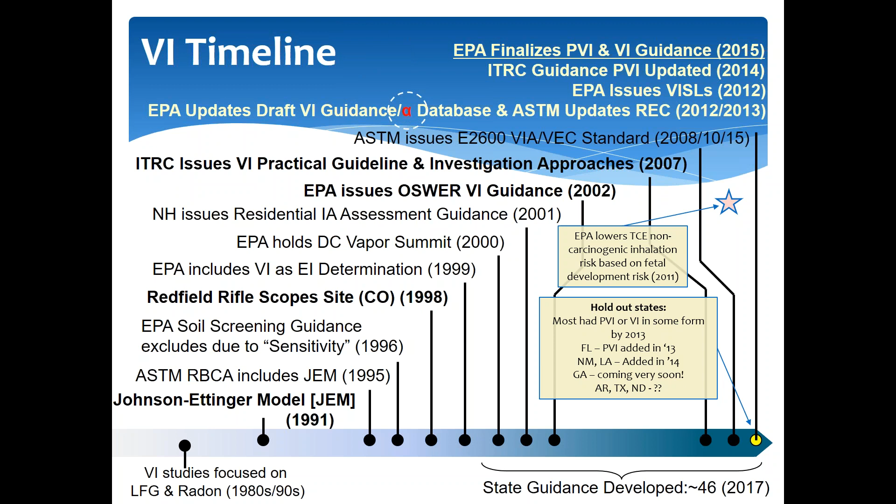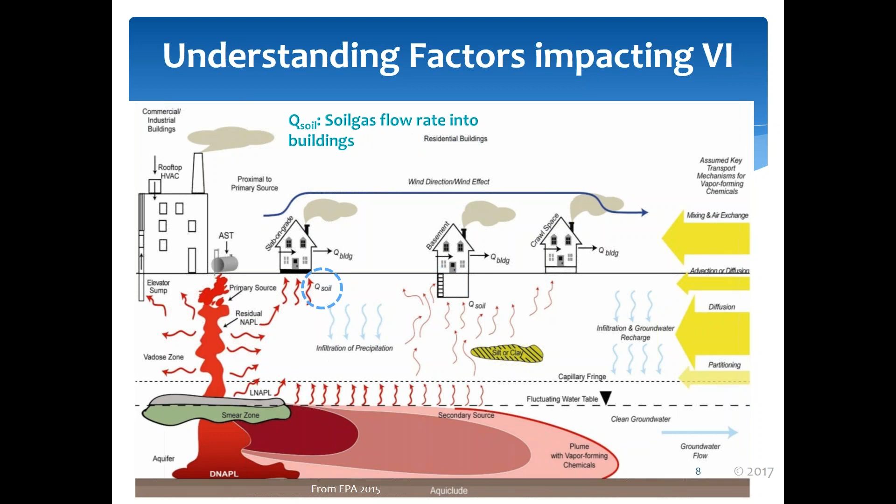All right, so behind all that work—sorry for the fancy curtains—we have what I'll generally refer to as your conceptual site model, an understanding of what's happening that can lead to why I believe there is or is not lines of evidence suggestive of vapor intrusion. The two most significant ones we often focus on are understanding right at the structure what the soil gas flow rate into the buildings actually is, and within the structure itself, how much air exchange or movement of air we're going to see.

Those become the most receptor-based criteria we can look at. The other things are happening in the environment. So a release has occurred, as you look at the left side. That release then takes on several phases—it might be in the soil gas phase, it might be free product, it might be a dissolved phase in the groundwater—but each one of those has a volatile component, if we're tracking a volatile organic compound that we're concerned will be related to vapor intrusion.

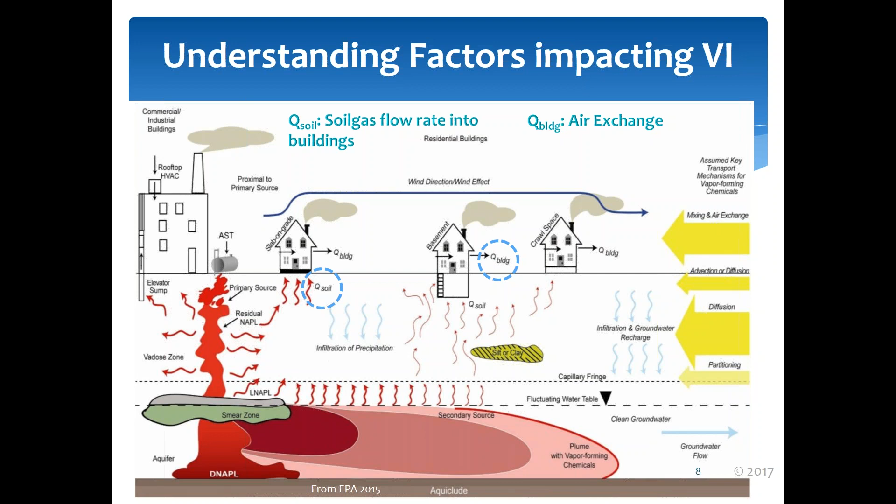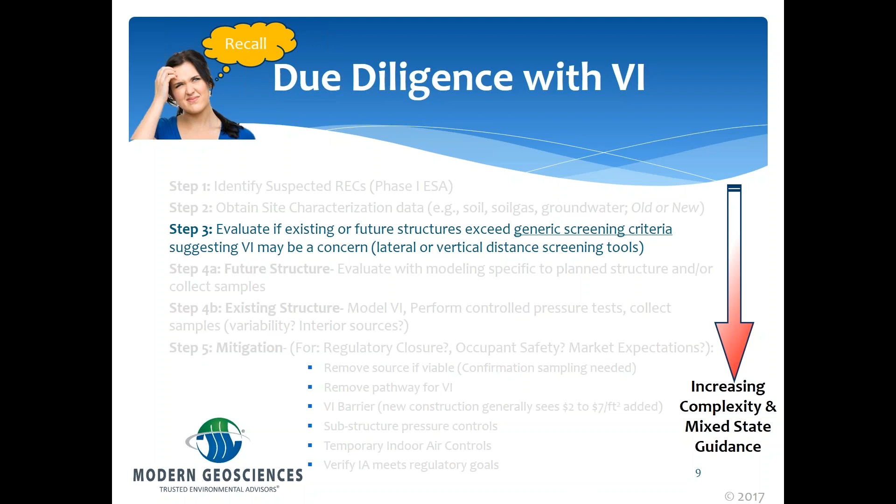So just to jump back to where we were, looking at environmental due diligence in general—what are the steps that normally lead us to beginning the story, understanding the story, and finding an end to our story? So whatever we got to first, we did our initial investigation. Maybe some site characterization data was collected, maybe it's ours, maybe it's somebody else's. But we reached a point where we determined we need to screen and say whether there is or is not a concern.

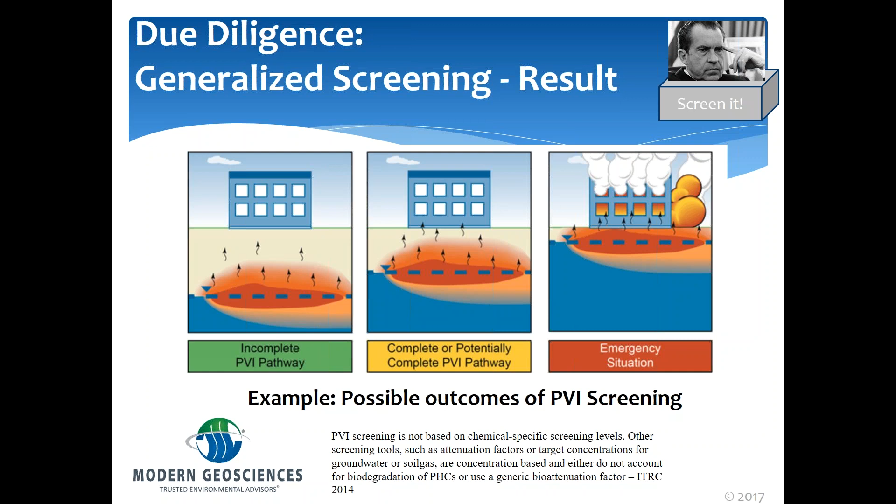It's hard to do jokes with this stuff here with no audience.

Whenever you do screening, you have this initial criteria—we may have, like I showed on that last slide, a situation where I'm in the middle, I've got some data, I think there could be a concern, I think there might not be a concern. When you're evaluating all of those, you have to understand what went into that screening criteria. Almost all of them—I'll say all for these purposes—exclude situations where there are preferential pathways in which you would not anticipate attenuation from where the release occurred through some media to where the receptor may be exposed.

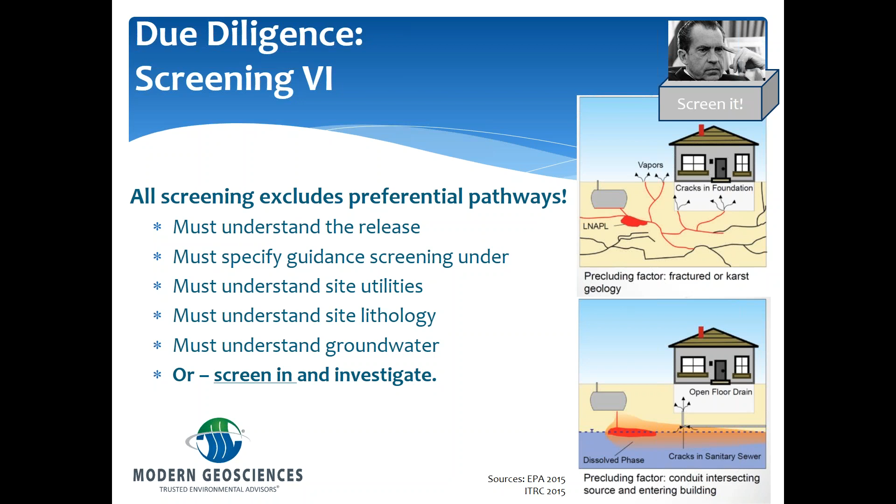As we begin to look at what we need to do next in this due diligence understanding, I'll make a segue into what we learned from a lot of these area-wide studies that have been done, several very high-profile studies. They've had a lot of scrutiny, a lot of data collected after the fact. There are some things we can know as we begin to look at what our scope needs to be going forward, so some of the lessons learned, if you will.

As I begin to scope, I'm just trying to inform how I would approach a vapor intrusion concern. I've now screened it and know I'm going to have to do something about it. So I want to know going in that the inhalation-based criteria we might use, the numbers you and I would breathe, can often be below background numbers for these specific compounds. It turns out we have lots of compounds around us that would fall under VOCs and even be a potential concern.

The second is just to give an honorable mention to TCE, because it's become a big risk driver since 2011 when some toxicological information was updated.

The other list of VOCs and related indoor sources, where these things could be up to 90% or more of just this compound, may be from your vehicles. So if we've got an attached garage, we want some information on all these paints and adhesives, cleaning supplies, gun cleaners, with some of them being just TCE, insecticides, air fresheners, dry clean clothing. All these things can play into your understanding.

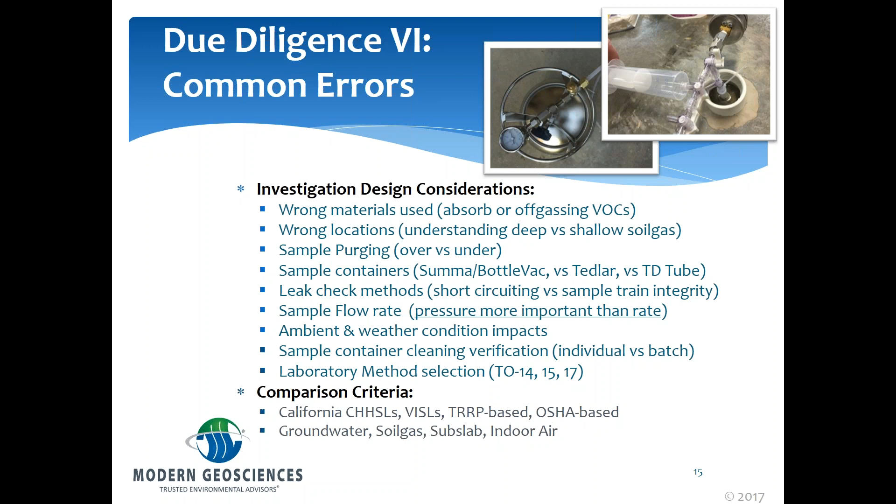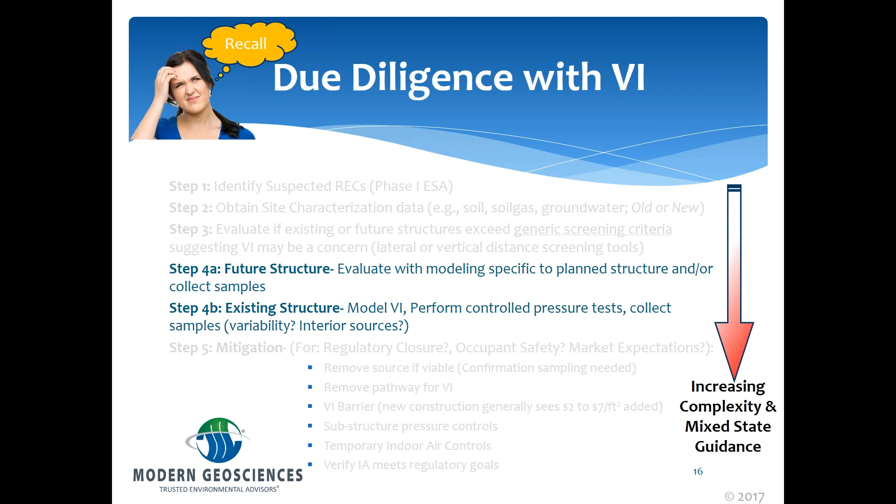All right, so now this brings us to where we were in this storyline. We were looking at our due diligence before, we've just talked about screening, we pulled it in, we've got an understanding of the framework. So now we really just need a structure - how are we going to investigate if there's a future structure planned or if there's an existing structure planned? So some variability with those two that we want to get answers to.

So we want to understand the regulatory structure we talked about. Will one event be enough to satisfy all the parties? Will we use some initial screening in the field to actually place our points? They're so important to us, and we have just a certain number we can use. I'll do some initial screening oftentimes and then plan where I put my soil borings, my wells, and even my soil gas points. And then do I have all the necessary supplies before I ever mobilize to the field?

Right, so we have to have that framework. So with that in mind, we want to understand what is our conceptual site model - our full understanding of the site. So here's an example of one where we may have a lot of data. I rarely get this level of data.

Hopefully my mouse can show up in here. You may have an understanding of what's going on at the surface - former structures, current structures, planned structures, soil data - and then some profile understanding of the lithology you're in. Is it going to be fine-grained, coarse-grained? Are there actually known exceedances and releases on the site?

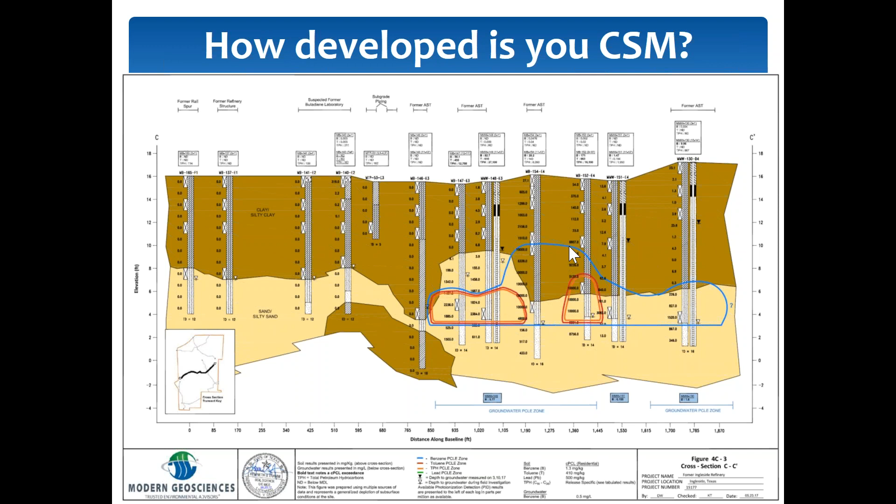Beyond that, where's the groundwater impacted versus not impacted? All these elements will feed into where I would choose to preferentially find a representative sample to help my client make a decision, or to help a regulator make a decision of whether I have the potential I need to go into the structure and answer all those questions, or if there's enough information, perhaps subsurface, to answer those questions. They each depend on the site, your conceptual site model, and knowing what you want to do next.

All right, so with each of these, you'll want to understand the different variability that's ahead of you, just like that conceptual site model had. So if you have spatial variability, I may actually have a source in one area versus another. I may have heterogeneity versus homogeneity, which allows me to take more samples versus less samples to get the representation I think I need. I want to have an understanding perhaps of the oxygen distribution if I'm dealing with a petroleum VOC.

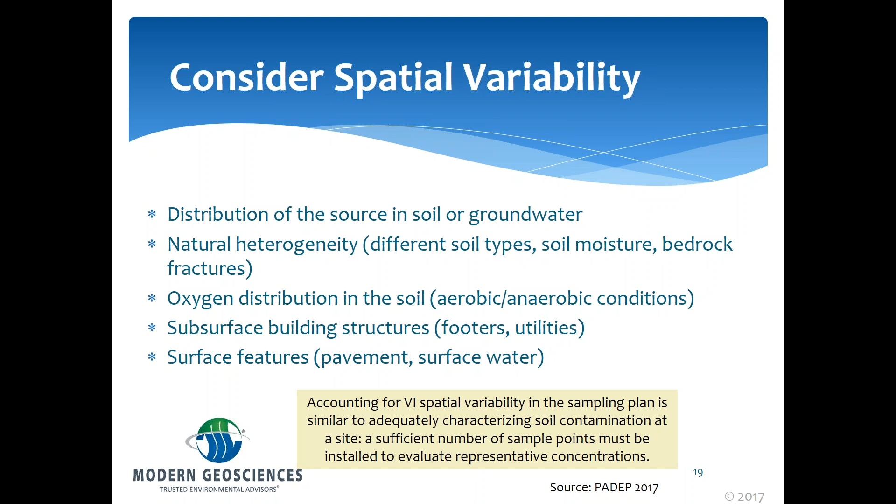Subsurface buildings and utilities, we talked about preferential pathways before. And then even at the surface, are there pavement or surface water features that may become an impediment that can inform why I think things would be in one place versus another. Again, it's all about getting a representative sample that you believe is a conservative understanding of the site.

So that's your spatial component. There's always a temporal component too, right? Things change, that's the nature. Groundwater and soil don't change as much on us, so we've gotten comfortable. But understanding am I actually here at a time period where I'm going to collect a conservative representation of the site will be important, knowing things such as the wind, the direction and speed, barometric pressure, the temperature.

Inside versus outside, obviously if we're warmer inside, specifically by maybe 10 or more degrees, I feel that's more conservative than the reverse. Precipitation and its ability to actually clog a lot of those pores is an understanding for the site that you're going to want to have.

The building itself and how it's laid out and constructed and actually in use will be important. Ambient contaminants that are from indoor and outdoor sources will be very important. And then understanding the potential for sample errors, as we talked about just a minute ago.

So here's a basic presentation. This comes from Pennsylvania, where you might choose to take different samples. So in this example here, we've got our concern. In this case, it's a tank. We love to blame the tank, so it's a good storyline to start with.

We, in this case, believe there's a preferential pathway. Maybe there's a sewer line that's connecting not only underneath where the tank is, but it goes all the way and connects to the home. So in this case, I may have information from what you see as number 1, which is a soil sample, number 2, which is a groundwater sample. There may be a reason to have other groundwater samples closer to the receptor.

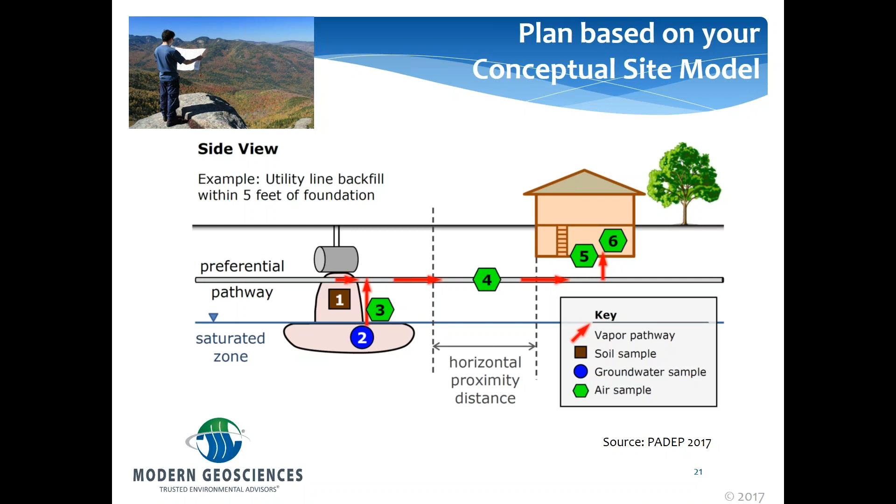So now the specifics of collecting each of those samples. In this scenario, what I have here is if a building is there or not there, we often turn to a soil gas monitor point. It might be called a vapor implant, it might be called a couple different things because the nomenclature is still in play in different regulatory settings. But as you see up here by our friend Richard Nixon, right?

So I've got my building outlined here because there may or may not be one, but you could take a sample. It could be near the buildings where it's planned to be, or it could be underneath where the building's planned to be. And so typically this will be some inert tubing that's been selected based on the VOCs you anticipate, and it'll be constructed to a specific depth.

Again, that can have a regulatory connotation. I'd say the 5-foot depth has become pretty common, depending on groundwater depth. We do a lot where we have some deeper understanding and some shallow understanding. We develop some attenuation factors for sites, but that's kind of the ballpark way to look at it. You do need to let it equilibrate for a given period of time.

That can be hours, depending on how it was installed, to even days, if you're using something with an auger format that turned up a lot of soil, and so we need to let all of that equilibrate.

Then we would confirm we don't have any leaks, either on the probe side, subgrade, or in the sample train side. Then we would collect our soil gas, and usually you construct your end point. On the top right, you have a 6-inch stainless steel, versus on the bottom, I've given you a couple different probe and implant styles that could be used. Again, those are designed based on what you're sampling in and what you're sampling for.

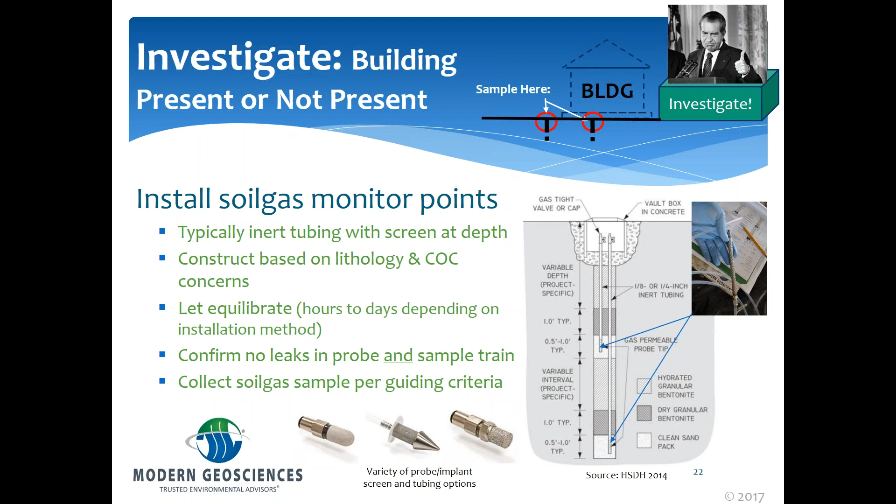Now if we do have a building, we have the ability to make some decisions. I can go into a structure if it exists. I can't go into it if it's not there. So I might use subslab, time-weighted, or come into an existing building and work with that building to see if we can actually make vapor intrusion occur.

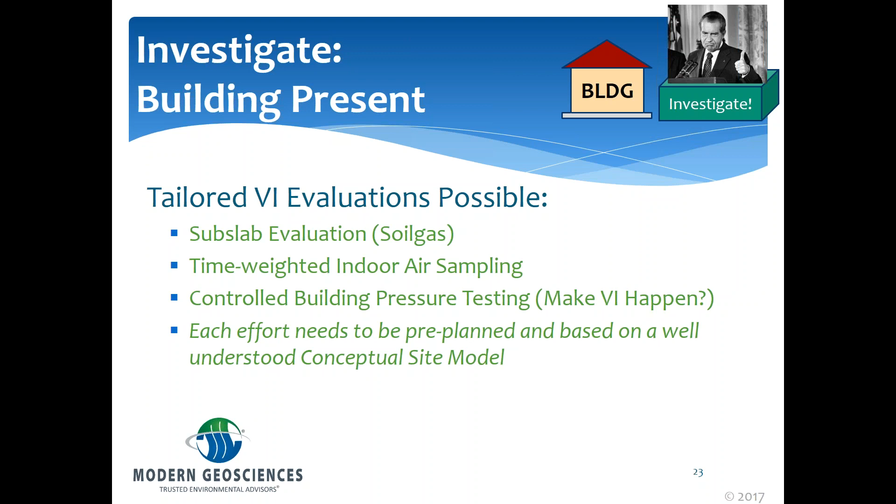So if we've made a decision that we've got a building and we want to do subslab, that's probably my second most common tool to collect information about vapor intrusion. Why? Because it's pretty inexpensive and minimally invasive. Usually we're going to go through the slab, make a very small opening, relatively cheap because the points are reusable.

And then we can do real-time screening either with something as basic as a PID to say hot, not hot, or we can bring a field GCMS out and say it's these specific compounds and within a ballpark these specific concentrations. We can also collect data that would give us information on whether attenuation is happening.

For example, is there methane physically there, or is there enough oxygen to attenuate petroleum compounds on the way up? So that would allow you to investigate, using these as an initial number of points, and from those make a decision—hey, we should go over here, or it's hot over there.

We've done that several times, very effective. It helps our clients get a lot done in one step versus maybe 2 or 3 iterations. And from what I'm told, time is money.

So the last part of that is you can then use these points to actually take your sample, similar to before. Make sure you've got integrity of the sample point itself and then the actual sampling train. You can actually get specific information here that I can't with my deeper soil gas, which is an understanding of the building pressure differential that may be happening sub-slab versus interior. So there's good information to be had for that. Easy to patch, and we're out. So a good tool to have in your mix.

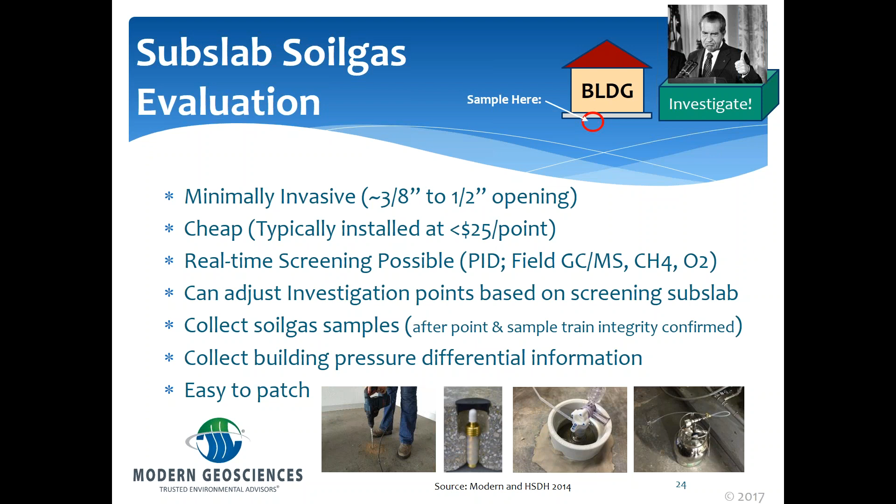You do need to understand that you can have really high concentrations and there be a lot of attenuation between here and indoor air. So keep that in mind.

If we jump to the other thing I can do when I've got a building present, I can take a sample of indoor air. Now I'll go to my last bullet point first here, because if I was going to do indoor air and subslab, I would make sure to do my indoor air first, just to avoid the potential that I would bias my indoor air by doing my purging of the subslab. So I'll just mention that because I have these in this order.

Within the air, once we step into a building, there are some more sensitivities that happen with understanding where you are. Is there a potential for indoor air contaminants to be adding to the story that have nothing to do with perhaps what you're investigating for? So obviously using those same tools we've mentioned before to answer that question is a big step.

Screen for those obvious vapor intrusion points. You see down below we've got near an electrical conduit—we do find electrical conduits which have connections not only through the walls but through the slab. Preferentially we do find a lot more coming from there than we do probably other areas.

Understand the weather conditions for where you are, any building parameters if you can get the information on how the HVAC system is working, what it covers, and normal operating conditions.

Like anything, if you're going to collect a sample for indoor air, you need to know if there's a potential to trigger any of these immediate response criteria, such as the short-term TCE goals that several EPA regions and states are using, because these numbers are low. I'll talk about background numbers in a second. But then make a decision on how long I'm going to run this, what kind of method I'm going to use, and make sure you've positioned yourself to get a conservative representation of site conditions.

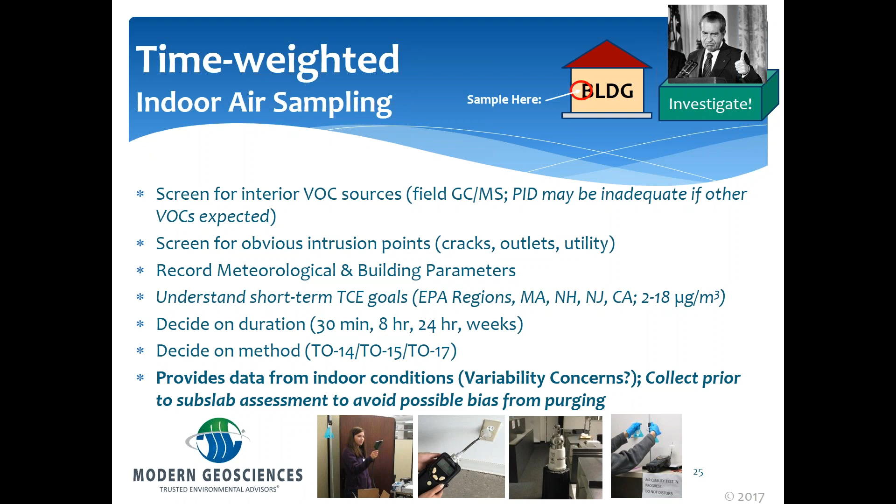The last element I'll mention is with smaller buildings or smaller areas, you can actually go and make a positive and a negative pressure. I was going to say normal, but normal is normal - you're not going to make a normal condition. But you could walk into a facility, investigate it as is, and then also control it and make it a high pressure building versus a low pressure building, specifically to cause vapor intrusion to happen.

So the one you see in the top right, that was one example. If you look at the bottom, under normal operating conditions for TCE, we found ourselves with 1.8 microgram per meter cubed. For PERC, PCE, 6.9. When we actually achieved negative pressure in the building, we had 66 versus 148. So we could make a conservative representation of what site conditions were, and definitely could there be a potential for vapor intrusion? The answer would be yes.

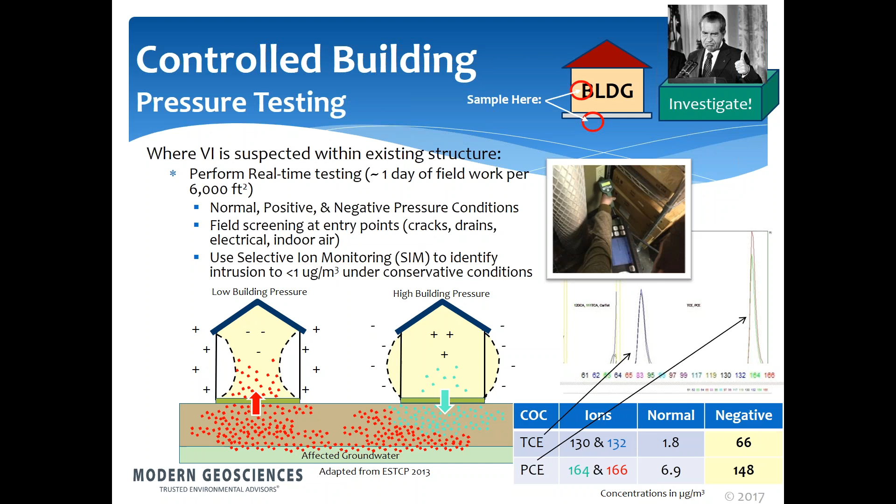All right, so background conditions. Now I've mentioned this a few times, but there's some concentrations of our friends - these benzenes, ethyl benzenes, PCE, vinyl chloride - where if we get into the 95th percentile of expected background concentrations in a residential setting, some of these numbers get higher than some of that criteria I've given you before.

Over on the right, you see a description of most commonly found compounds in background studies, from the top going to the least. So 96% of the time we're finding toluene, concentrations 0.03 to 1.9 microgram per meter cubed. And then move on down. Luckily, many of the ones at the top have higher numbers than what these concentrations are found.

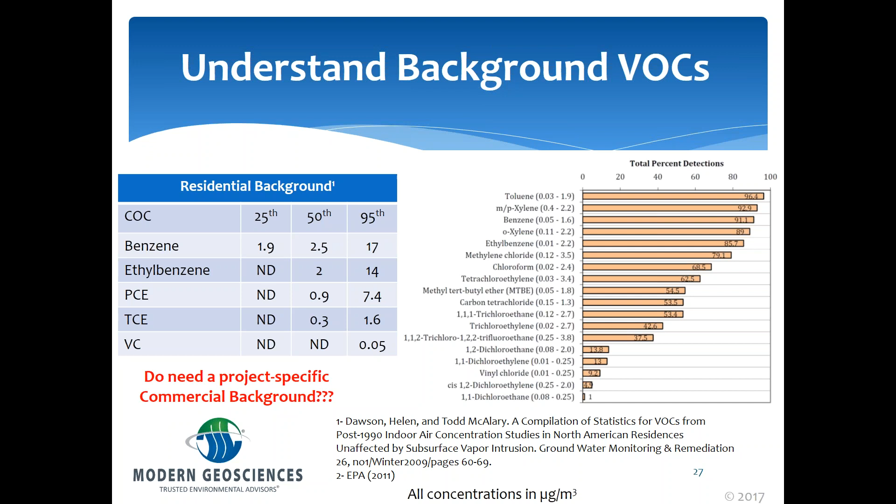But as you head to the middle, a few of these are starting to get close to numbers where they would be of concern. So we really need to know, are we talking about a background setting issue versus an actual release? As we look at indoor air quality, if we've taken a sample, we're now responsible to say, what does that sample mean?

So we find ourselves in the middle of this train wreck that exists between EPA and OSHA. No comedy intended with the accident in the top right, but OSHA ensures employers provide a safe work environment. They have the authority to promulgate binding national standards to safeguard worker health and safety - legally defensible, been put into courts and used for decades - and they actually publish permissible exposure levels. Now those do incorporate economic feasibility, so if we're going to judge risk, I can't have that criteria in my understanding if I was just going to be black and white about it.

Flip that over, the EPA has generally focused on everything except workplace air. So if you're in those settings where you have a commercial operation - somebody's selling chicken nuggets or burritos, somebody's selling carpet and tile - we've exited the residential side. Now we've reached this gray area.

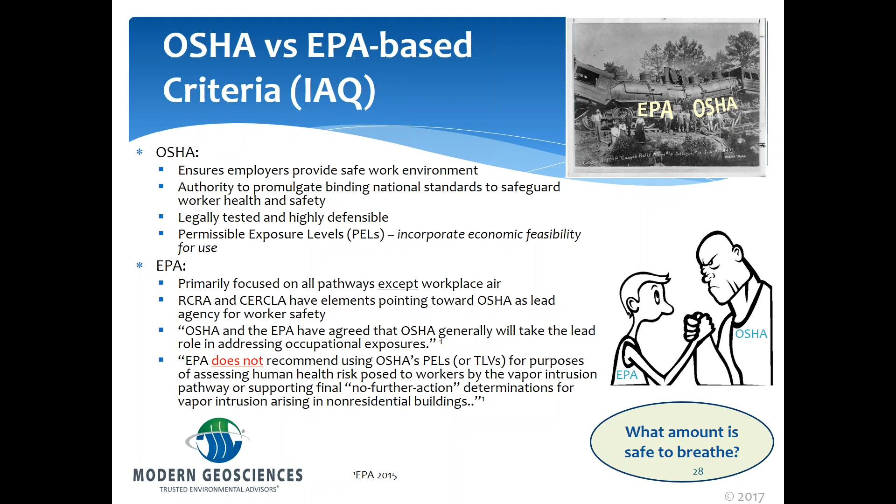Now I will say that the EPA in their 2015 Vapor Intrusion Guidance document specifically sets forth that the EPA does not recommend using OSHA PELs. Now within a regulatory context, most states will allow you to use certain PELs or ACGIH numbers, or even a few other workplace health and safety based criteria, provided that it's done in a planned setting where there's actually informed employees, and these are the criteria we use. But those happen when there's a dialogue with the regulator.

So if I put these into context, here's three I've chosen: TCE on the left, tetrachloroethylene or PCE in the middle, and benzene on the right. On the far left of each of these, I've got their vapor intrusion screening level - of 2.1 for TCE and 8.8 if I was in a commercial setting. My background number is 2. I'm floating right around that.

Now this is my 95% UCL, and these numbers you see that I've compared here are based on a cancer risk of 10 to the minus 5 and a hazard index of 1. So not all states - some have lower, some will allow a little bit higher - but either way, these are a good general rule criteria, versus if I head to NIOSH and I want to use their criteria, that's 134,000. So that's a far cry from 8.8.

Let's check over here at PCE. I've got 180. It's a far cry from the 678,000 from OSHA.

Or 169,000 micrograms per meter cubed from NIOSH. Benzene, studied longer, has probably evolved a little bit as these other compounds will with time, so you'll find these numbers are a little closer, but they're still significantly higher.

Now what would be the result if we actually took this and moved it to somewhere like California, where I may have a 10 to the minus 6 based criteria versus a 10 to the minus 5? So one incidence in a million versus one incidence in 100,000 of a cancer occurrence, and even move my hazard index to 0.1?

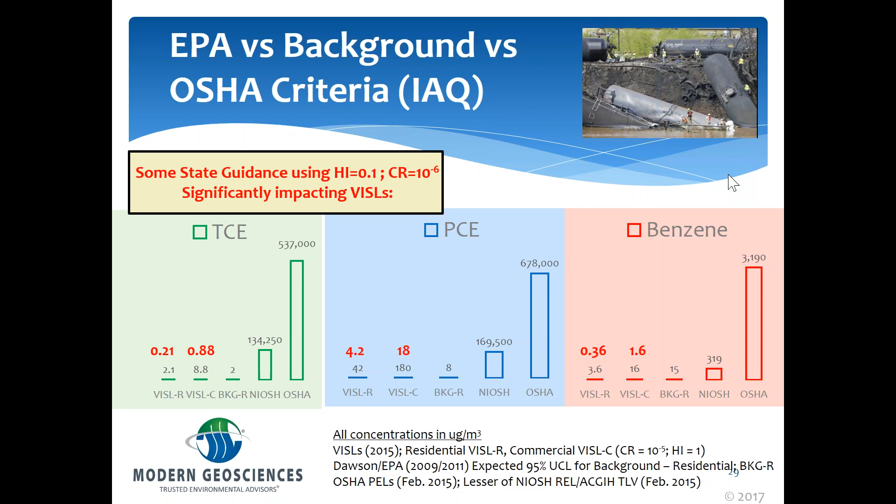So there is some disconnect, hence my depiction of the train that's kind of gone off the track here. To us, the consultants and the professional community that must judge this, it means we just have to understand where we are, and get our own background studies oftentimes to answer this question. So it's just something to keep in mind as you move forward.

Now, in all of these, I teach a risk-based corrective action class at the University of Texas here at Arlington, and this is a formula, very basic. It applies to many things, but applies to us here, right?

So risk itself, some threshold we are agreeable with. As a community, we made some decisions that we're okay to drive, and a certain number of accidents happen. We allow people to make decisions of what chemicals they want to use in their daily life, and accidents happen from that. So there's a risk criteria, whether that's maybe 1 in 10 to the minus 4 or 1 in 10 to the minus 6 for that cancer rate, for example.

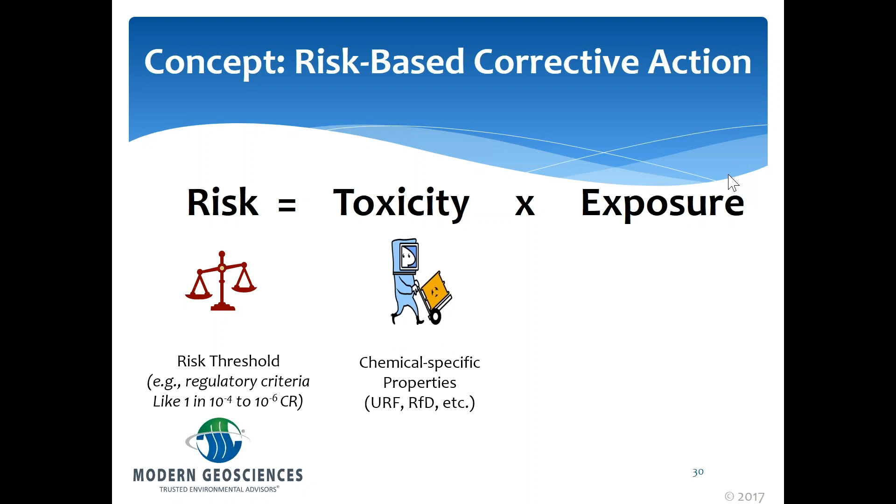So risk equals these two things together: the toxicity of the compound that we're talking about and our exposure to it. Obviously, there's radon in the room that you're listening to me in right now, even if you're outside. You're those lucky guys in Hawaii.

That said, the risk is generally very low because our exposure is low, right? So the risk is high if I was right at the compound, if I was down deep enough to be exposed to it, but given enough attenuation from down there to up here, I think we're fine.

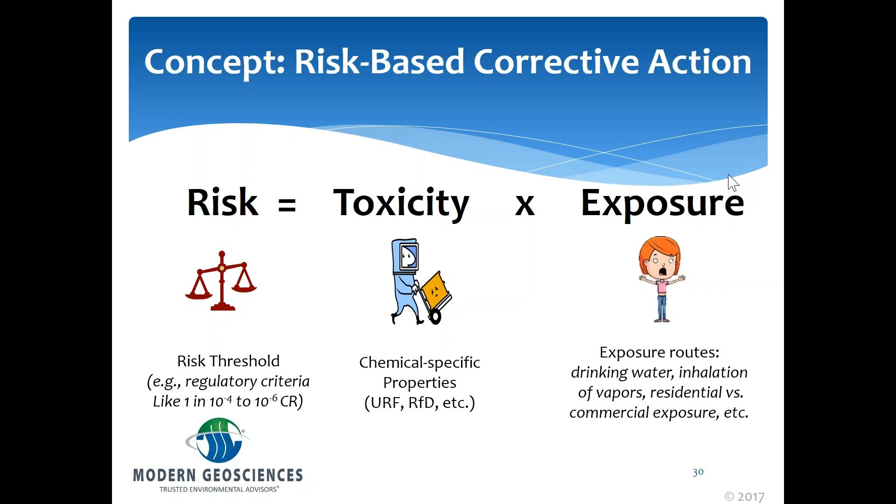All right, so I'm going to touch on attenuation just for a second. So whether I took groundwater data, soil gas data, or subslab data, there's a way to find yourself some attenuation understanding. So what is our attenuation factor?

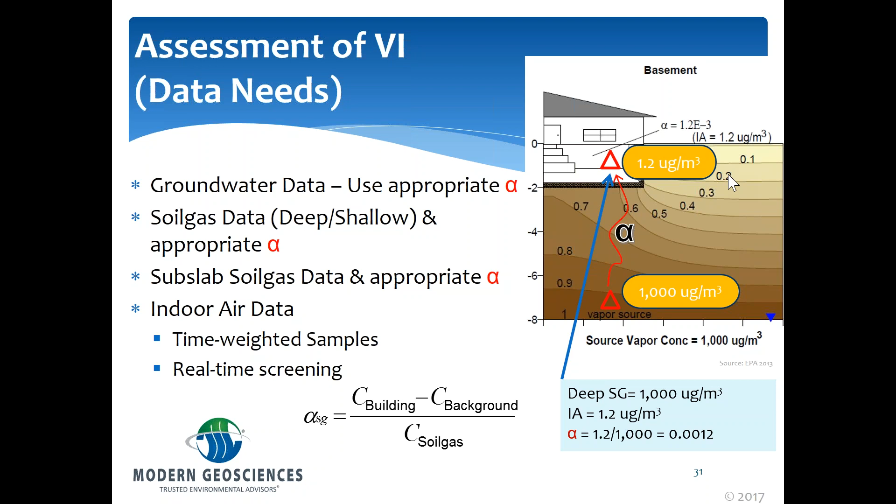Here's an example where I've taken a soil gas sample at roughly maybe 7.5 feet down at the bottom, and it was 1,000 micrograms per meter cubed. We took an air sample, it was 1.2. Our assumed—I'll call it theoretical, you can call it empirical if you want—attenuation factor then brings us to a 0.0012. The smaller that attenuation factor, the greater its impact will be on the samples that we're going to judge.

Here's some information. I think I talk too much, even though I'm just talking to myself on a computer. I don't know how interesting I actually am to listen to.

If you wanted to say, where can I get my attenuation factor, there's a few places. We can do it at a site specifically, like I just mentioned. We can do it with radon, which gives you a tracer compound essentially you could work with. You could look at the EPA database. You could use the 2015 default criteria. You could develop your own using models. Either way, you can develop a number.

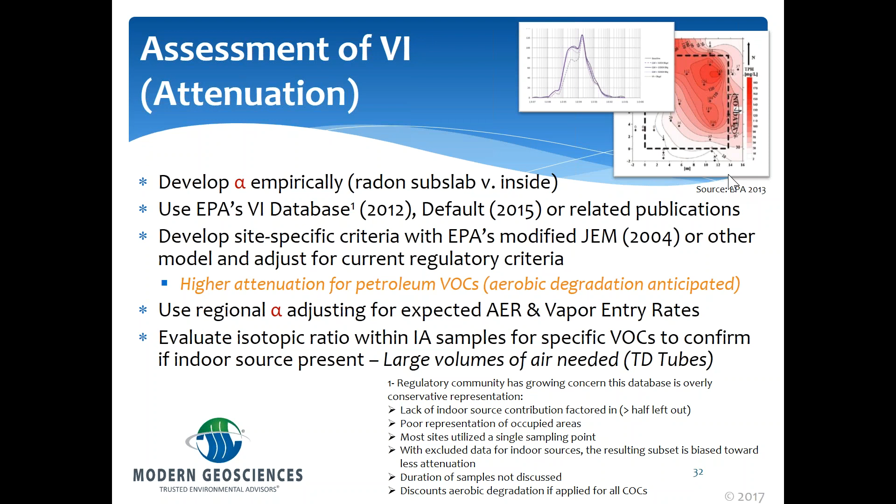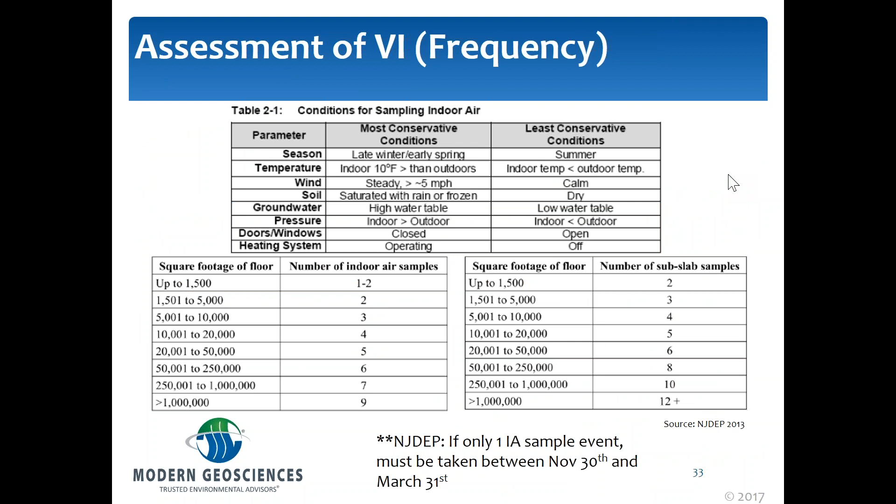Another thing to keep in mind is the frequency. So here I've given you the New Jersey Department of Environmental Protection criteria, whether I was going to take an air sample, subslab sample, and then the most conservative conditions versus the least conservative conditions. So, low on time, I'll let you read those.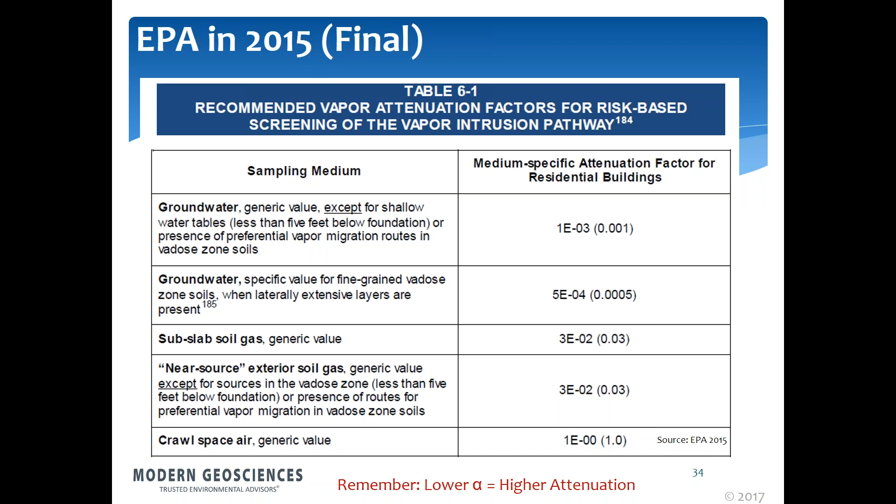When would I expect to have vapor intrusion? Obviously, if I'm closer to the source, I've got the kind of geology that suggests it, moisture content is relatively low, low capability for biodegradation of those compounds, or I've got a building or structure that would lend itself to letting the vapor intrusion come my way.

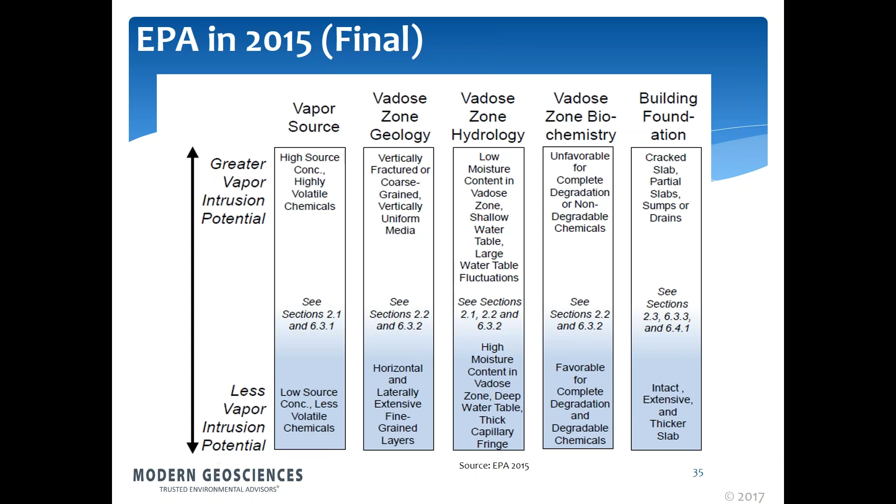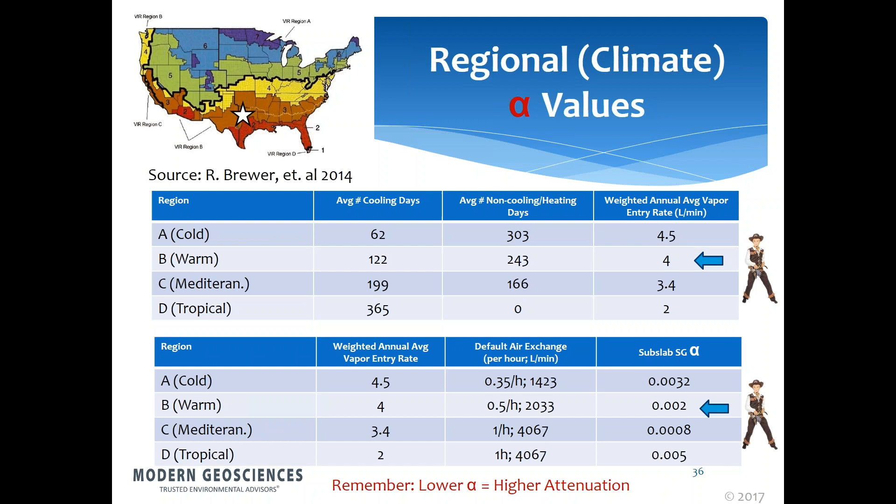One new one, and I'll call it new although it's a bit older now since it's 2014, is to take criteria such as regional climate understanding - if you're in a certain area, buildings were built with a certain criteria, and if you put those together you can develop your own subslab attenuation factor. For Texas, for example, where I am, it would be 0.002 under this understanding.

So I've put together here, and I don't want to belabor it because I want Tom to speak - he's a much better presenter than I am. But if you look at this, with the slides we'll send out, on the left I've got the compounds, and on the top I've got the attenuation factor.

If I had a 0.1, what does it mean? 0.03, what does it mean? 0.002, what does it mean? And then I've given you some existing examples that are out there right now, be it a vapor intrusion screening level or if you were in New Jersey with their VISLs. So you can just see the changes that happen.

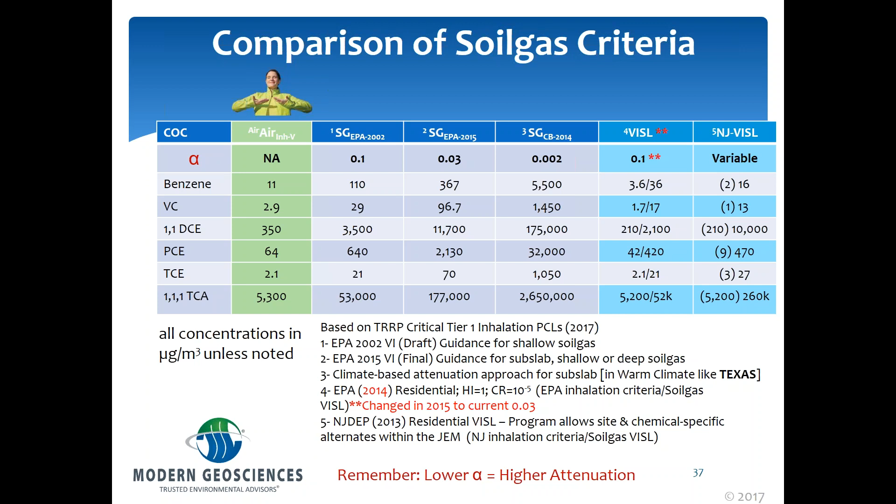My inhalation criteria - that's what I can breathe directly, so you're there in green doing it. So if it was 110 in that default 2002 guidance versus today, if I were to use that area climate base, where's my building at, what's my expected building specific information - it could be as high as 5,500. So there's a lot of different criteria to judge.

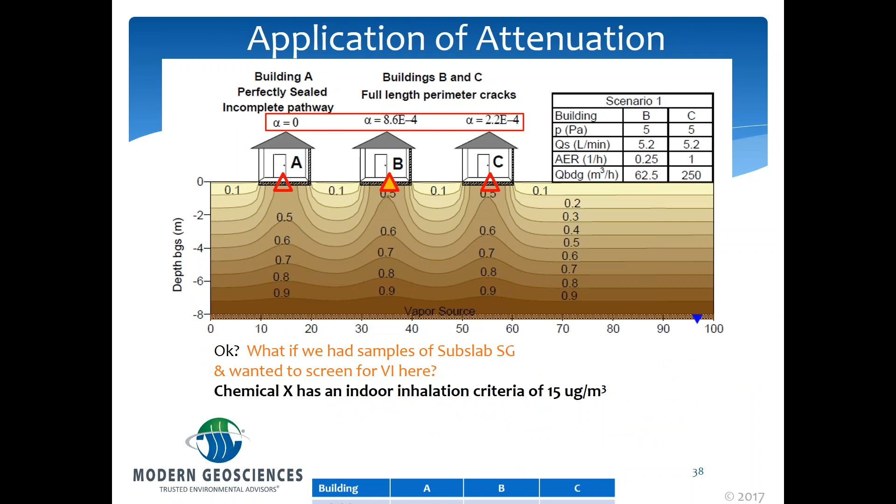So these are all based on Texas criteria because that's where I am. There's my little guy - I won't go through this example, but I think you've got it from the last one. The only other one would be if I was looking to go backwards from groundwater.

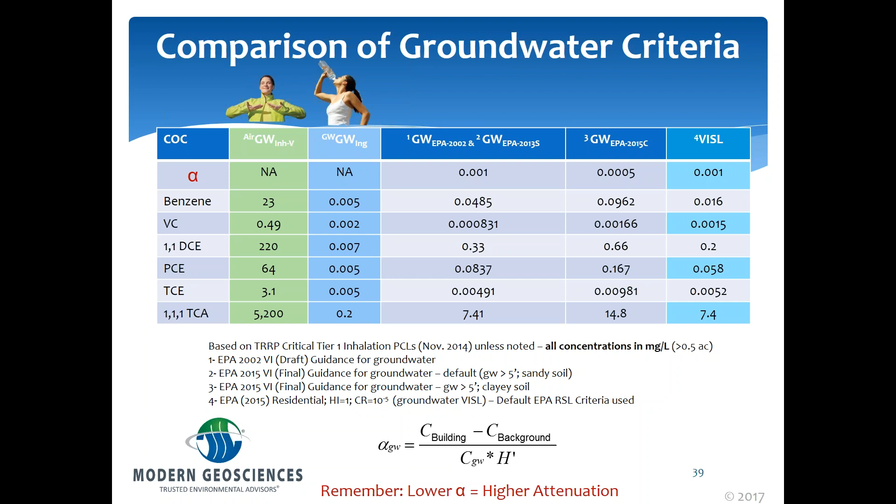So I've got my attenuation factor - this is where you're given the 0.001, which is your default for EPA, versus 0.0005 if you were in clay. I just thought it was helpful to see the differences of what concentrations in milligrams per liter would anticipate a vapor intrusion condition. You can see we move from low numbers to a little less low numbers, and how those correlate to a vapor intrusion screening level on the far right as well. So that's the importance of understanding your attenuation factors.

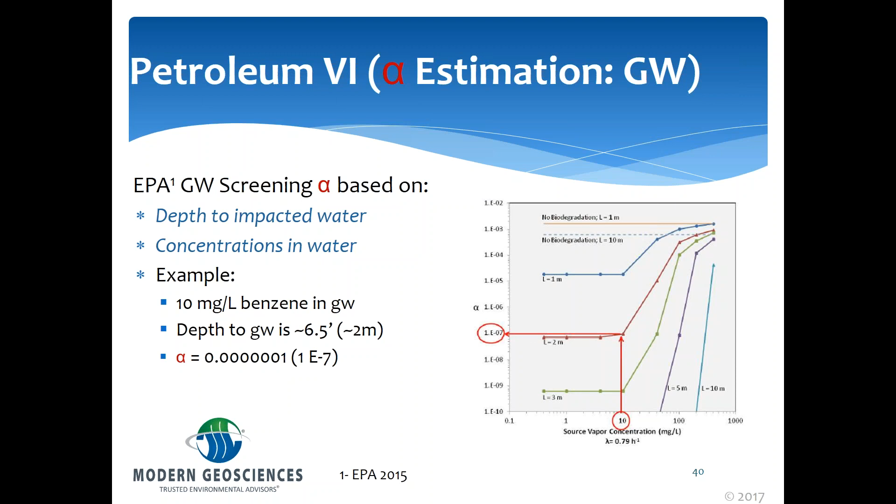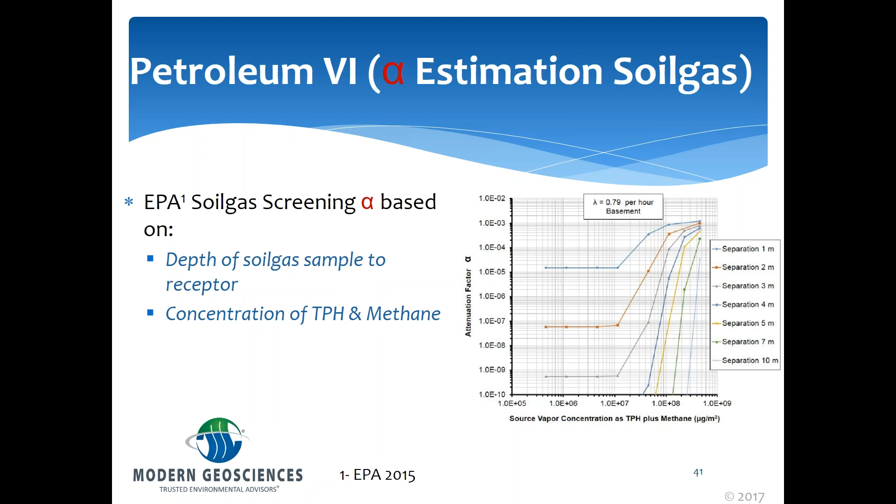Just a note for the petroleum side of this - the EPA criteria specific to petroleum vapor intrusion gives you one other tool that you can use: if you can get your data and understand how deep you are to impacted water, and the concentrations present, you can use this to derive an attenuation factor. Or alternately, if you use the concentration of all your total petroleum hydrocarbons, add them up with your methane, and the depth of the soil gas, you can use that to get an attenuation factor as well.

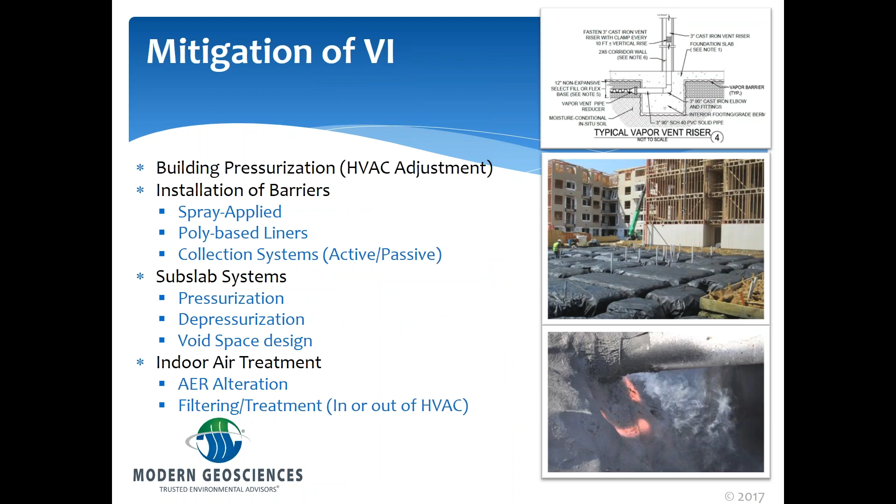So with that, hopefully I've left Tom enough time, and I will turn it over to you, sir. Unless I've put everybody to sleep.

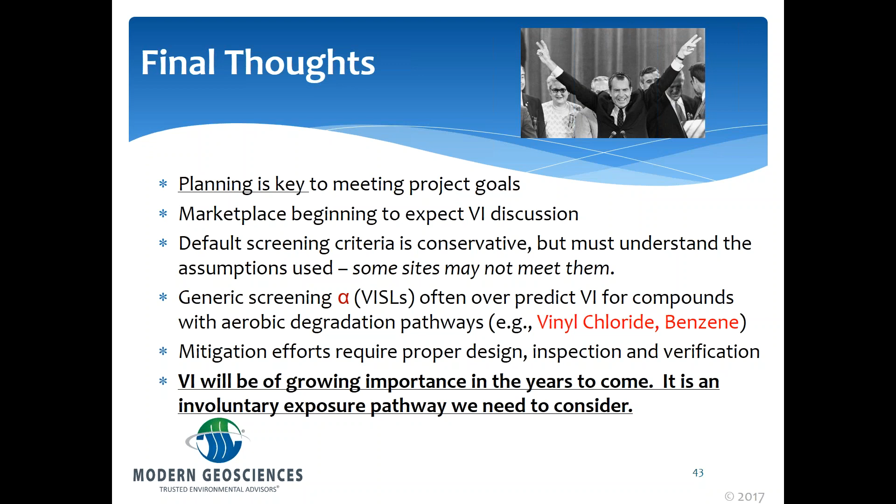Thanks, Ken. And as he asked, if everybody can hear me - I'm not going to get a response, but I'm assuming yes. Go ahead, I was just telling you that I could. Sorry, great.

So I wanted to just take a few moments - for those of you that were on our webinar from last month, I took a little bit of time talking about mitigation. Just wanted to take a few moments to talk about some successful vapor mitigation case studies that Land Science has been involved with. Throughout the nation, we've installed and been involved with close to 1,000 mitigation sites.

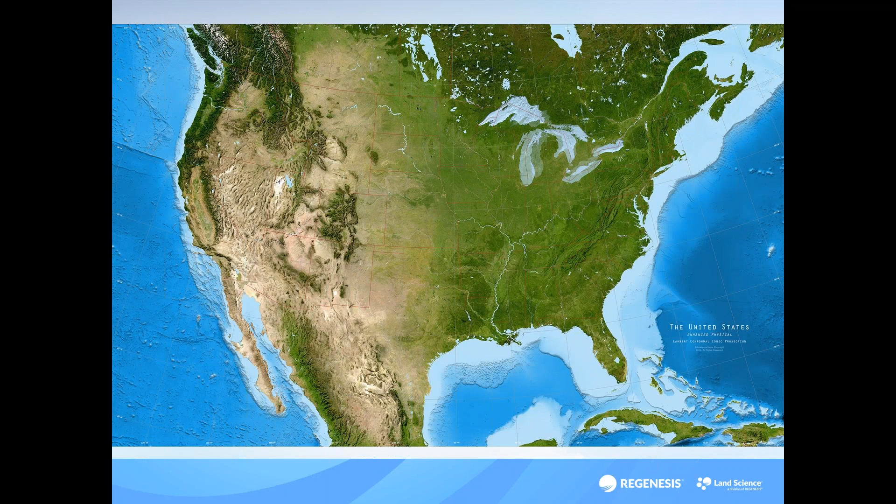I could hone in on many different states. One of the states that are continuing to show VI concerns and have been hitting the news quite a bit is my actual old hometown, home state of Michigan. So I wanted to take a few moments to talk about a few successful sites in Michigan that Land Science has been involved with, and just kind of walk you through the process of what we've been involved on some of our sites.

First one is a vapor mitigation site in the Detroit area. It was a national award-winning site, and I'll get into that in a little bit. The environmental firm that was involved with this was AKT Peerless, and it was developed into a medical supply warehouse facility.

There was a hodgepodge of contaminants out there, from chlorinateds to mercury to petroleums. It was an old rail yard, commercial settings, as well as manufacturing facilities from back in the early 1900s. So with the development and working with the DEQ and US EPA, the environmental consultant was able to determine the appropriate methods of source removal and whatnot, but they were still meeting with a vapor intrusion concern before they could do any type of redevelopment.

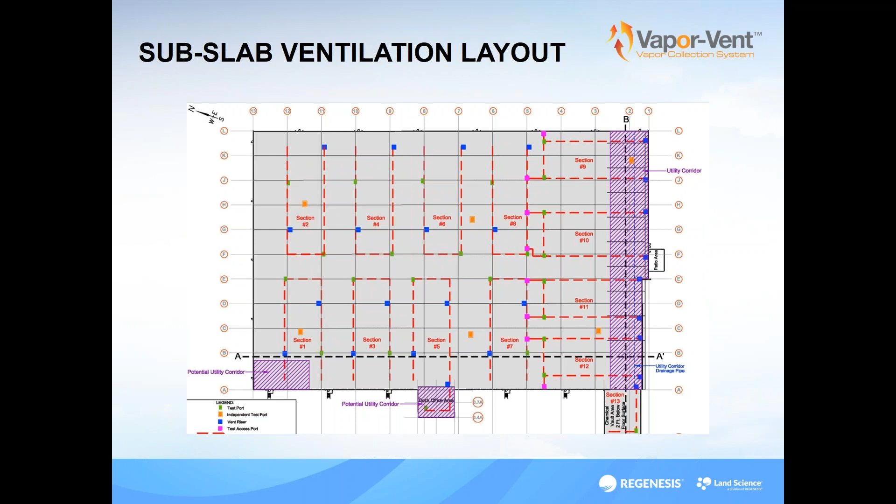This was just the vapor vent layout, so it was laid out before the actual barrier was to go in, and each one of those loops you'll see were designed in a passive aspect to then eventually be converted to active if necessary.

The Geo-Seal barrier, if some of you were on the previous webinar that we had from last month, I talked in a little more detail of it. I'm not going to spend a ton of time on this, but it's just 3 layers. You've got your base, which is HDPE, you've got your core material in the middle, and then the top layer, another bond layer, that's HDPE, bonding that together, and you'll see here in the picture that you actually see the vapor vent laying below that.

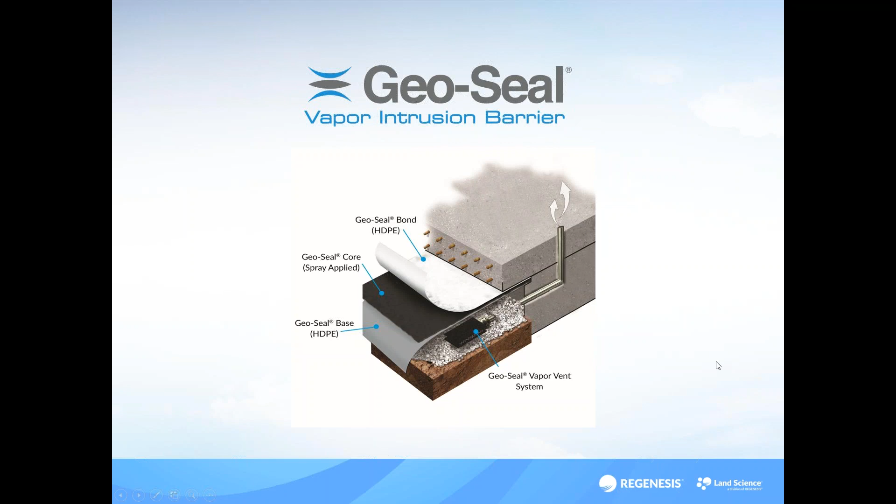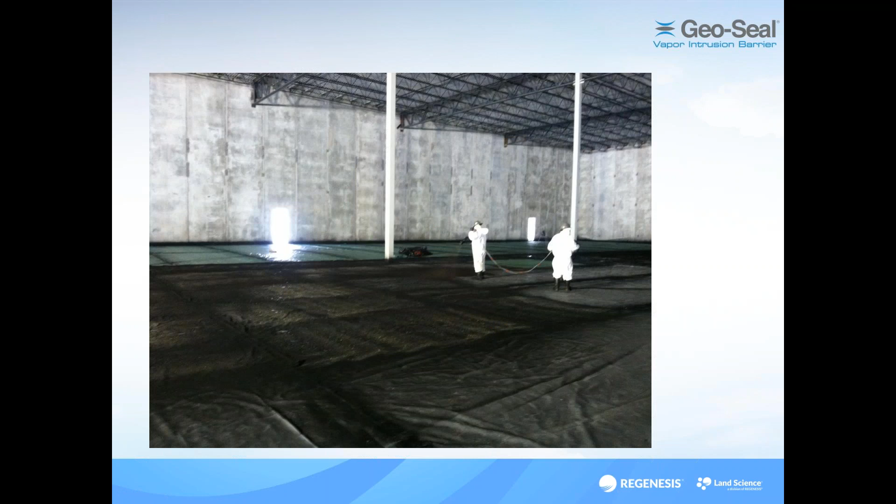That's how this system was laid out at the facility in Detroit. This is an actual photograph of the core material, that middle layer if you will, going down on top of the base layer, and it was under the entire envelope of the building.

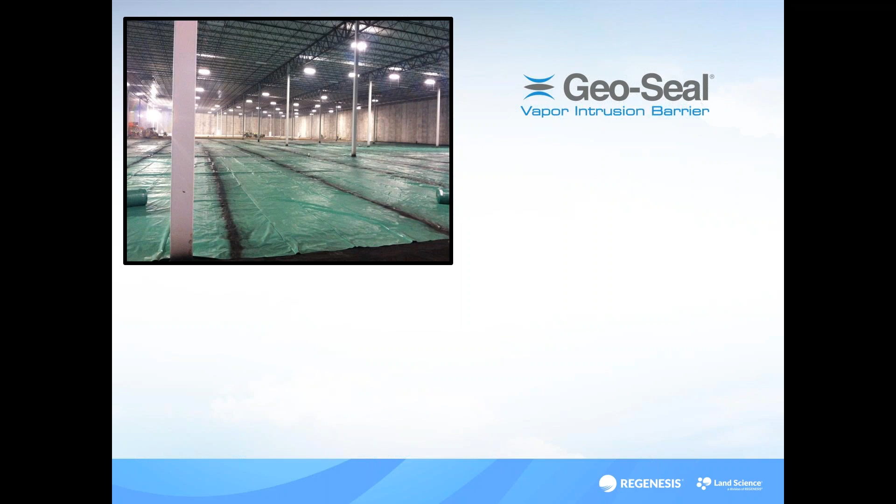Now, I said it was an award-winning site. To give you a little more information on that, if those on the webinar understand the Phoenix Award - if you don't, I'll give you a little background. The opportunity is when you go through the Brownfield Redevelopment and Brownfield Conference, you get nominated, or possibly nominated, for a Phoenix Award within your region as the top Brownfield project. Well, this facility actually won the Region 5 award, which is up in the Michigan area, for the Phoenix Award. But then it was ultimately nominated because it won that award for the grand prize. And this site also won the grand prize Phoenix Award as the top Brownfield project. It also won the People's Choice and a few other awards too. Basically, it's coined as - I can say - it swept the awards at the Oscars.

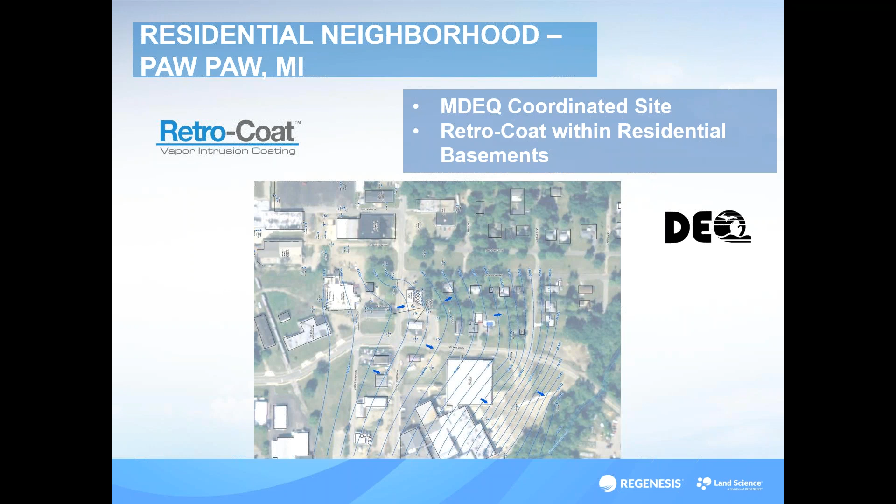The next site I want to talk about is also in Michigan, and this one was a DEQ coordinated site in Paw Paw, Michigan. For those not familiar with Michigan's detail, this is southwest Michigan. Southeast and southwest are hugely different geologically. Here we're dealing with very shallow groundwater in a sandy aquifer, which creates a much more prevalent plume distribution through the contaminant site.

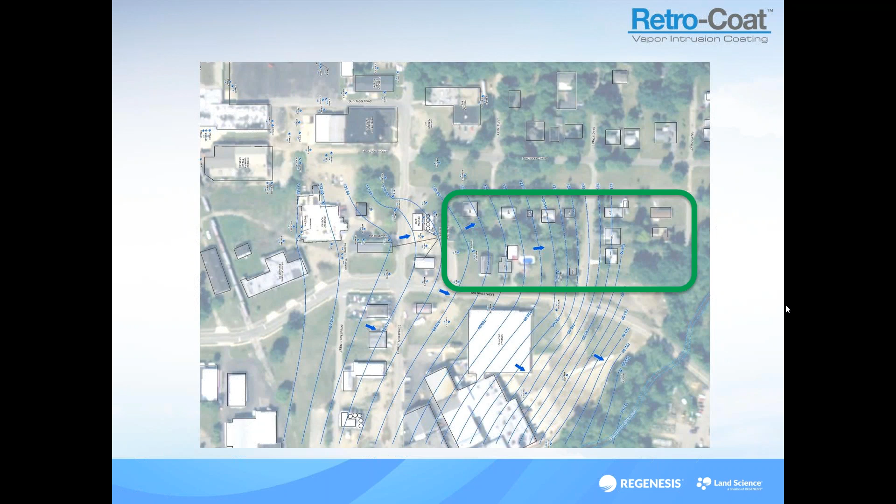First I wanted to talk about the site itself. You'll see there's a groundwater flow arrow I added to this map, showing groundwater flowing in a northerly direction. I had to spin this so you could see it, but it's actually in a northerly direction. This neighborhood here is within the groundwater path of where the contaminants happened, so we had a groundwater contaminant plume going underneath the neighborhood itself.

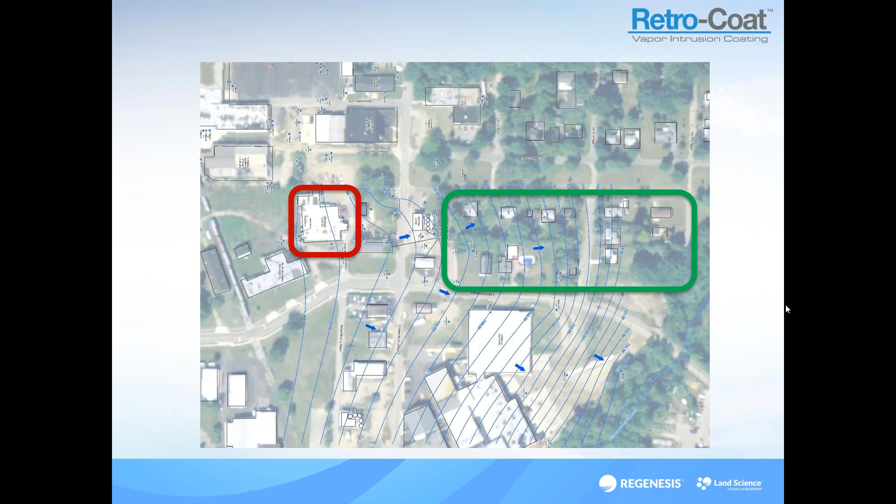But what's the distance? As discussed earlier and on the previous webinar, there's a distance between where groundwater is versus where building influx is. Well, in this case, the groundwater was in direct contact with the basements. So a subslab depressurization system was not an option. There was a groundwater remediation handled through that, and some REGENESIS products were also used there.

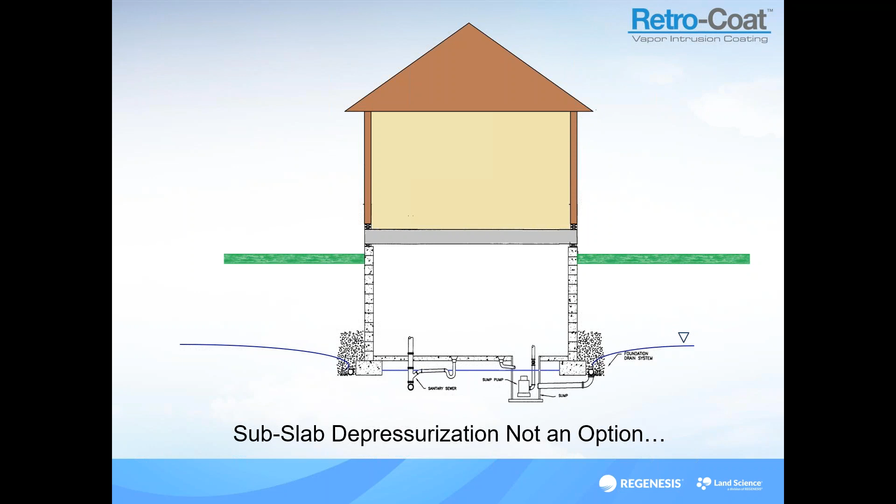But the state of Michigan also realized there was a vapor intrusion risk at this site because they took indoor air samples, or indoor basement samples, and identified chlorinated solvents within the basements themselves. So they had to figure out an appropriate manner to ensure vapor intrusion mitigation and a solution for all these residential homes.

What they ultimately moved forward with was the RetroCoat system, which is an epoxy type system that Land Science developed that creates a vapor barrier on top of concrete. Here you actually see the sump, which was lined as well, creating a preferential pathway by putting a vent through it so it could off-gas any VOCs collected in that sump through the piping system itself.

Before I move on to the next site, I wanted to briefly mention that the state of Michigan is still working through this site, and they continue to collect indoor air samples in the basements of these buildings. To date, they have not found a chlorinated hit above basically non-detect. They were able to determine that it was some other glue that was identified. But there has been no vapor intrusion from the subsurface into the building since RetroCoat has been installed, and the state of Michigan is working with local consultants to continue managing these facilities.

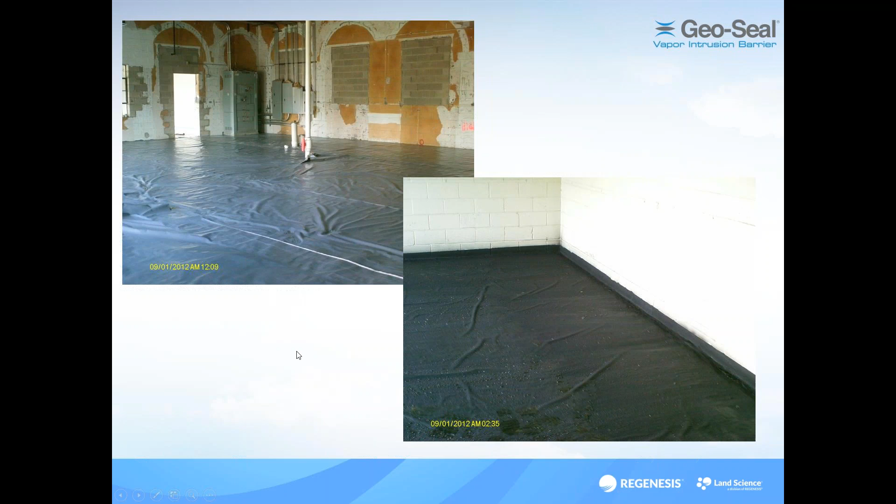Then the RetroCoat itself, as I talked about before, is a layered system that can be put down on top of concrete. Why was it important for the garage? Well, they had a basement, and for some of you in the Midwest, they often call them Michigan basements, or if you're from Indiana, maybe it's an Indiana basement.

The concept is they have a primitive basement there, and they had to be able to seal this basement appropriately because they were going to use it as a walk-in cooler. So we went through the process of designing this system so that the retrocoat could seal these walls and leave them exposed, and then they could put their cooler system into the basement itself.

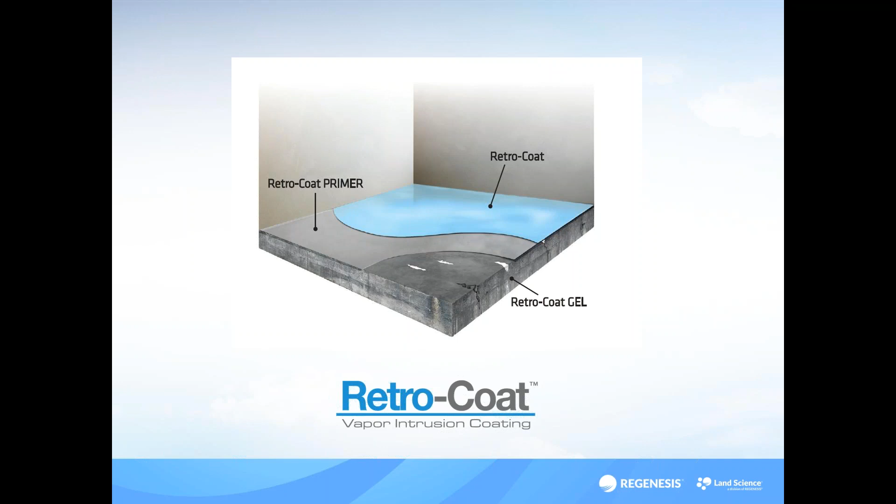This is just a quick picture. Up in the top left is the actual basement, the Michigan basement. You can see some of the CMU wall and whatnot.

Now the other aspect of the retrocoat was this little half wall you see on the right. If you're ever in the Northville area, you'll go into the restaurant and actually be able to walk right up to that wall. That wall just had exposed dirt on the other side, and they wanted to leave it exposed. That's why retrocoat was recommended, because the Geo-Seal was going to have a protective coating over it, and this one could actually remain exposed to regular traffic.

The next site I want to go through is a residential development in Traverse City. Traverse City is in the northwest up by Petoskey, not too far from the Mackinac Bridge, in the Mackinaw City and St. Ignace area. It's a higher end area, and a lot of folks from the Chicago area come up to Traverse City. Big cherry festival, wonderful wines up there too, if I can put a plug for that.

I wanted to spend some time on this site because it was another combined Geo-Seal and retrocoat with a passive vapor vent, a brownfield redevelopment site that was successful with the state of Michigan. Again, AKT Peerless is another environmental firm we worked with on this one, and they worked through the successful development of a brownfield redevelopment so that we could get this solution.

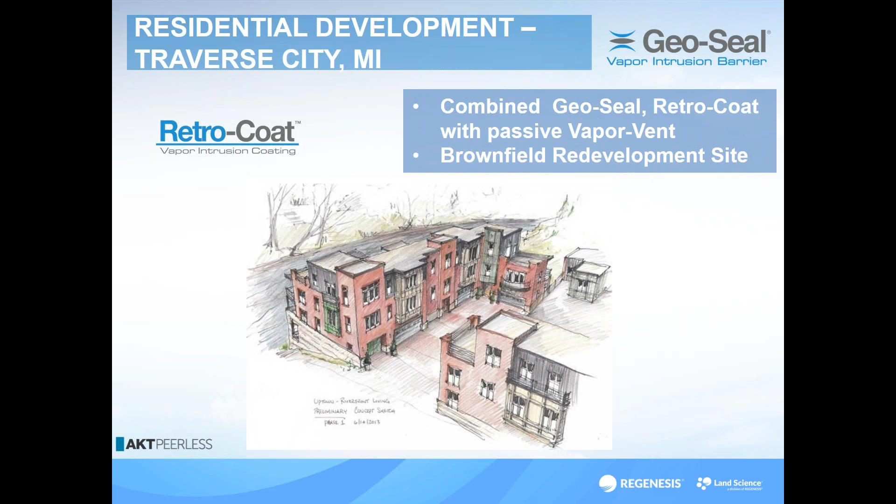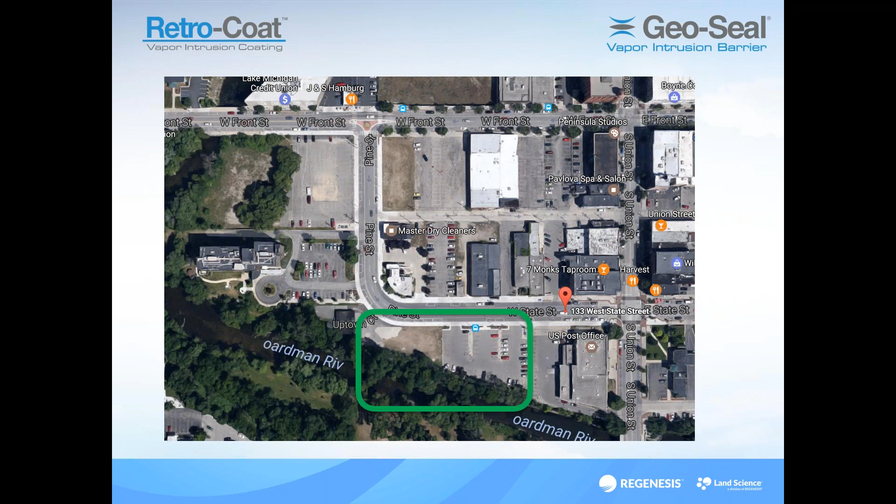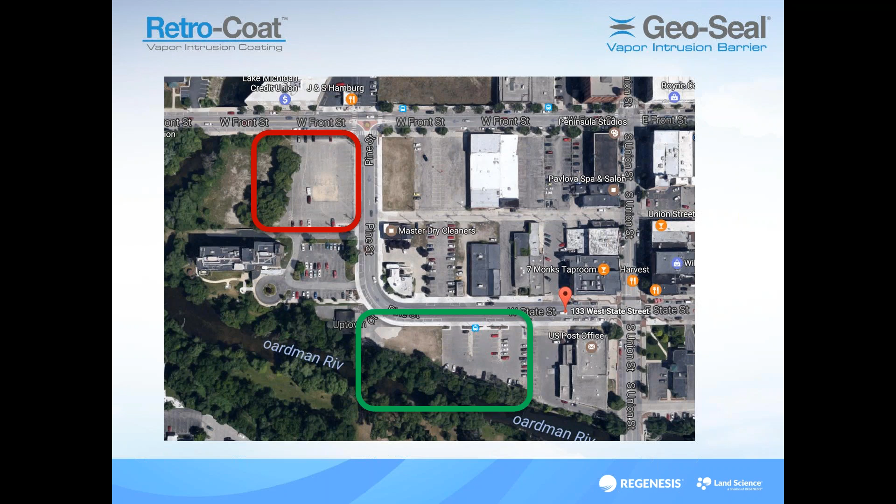Here's a quick aerial so you can get some distribution of what we're talking about. This is where the site sits now, a multi-residential development on the Boardman River. Up here you'll see where the actual contaminated site, a dry cleaner facility, had a chlorinated plume that migrated southeast, a little more east than south, but it moved in that direction towards the Boardman River.

This was the development in the primitive stage of drawing it out. I wanted to hone in on the benefits of using exclusionary zones, and we were able to work with the state of Michigan through this to not have to put a barrier system under all these buildings. These left two buildings are the ones that actually needed the barrier system itself.

Going back here really quick, the ones on the right, the exclusionary zone was determined basically in this zone, coming right in between these buildings. Once we determined that based on the farthest point of contaminated groundwater, basically on this corner of the property, we were able to show that the exclusionary zone ended here. So these buildings were determined safe and approved by the state of Michigan, not needing a vapor mitigation system.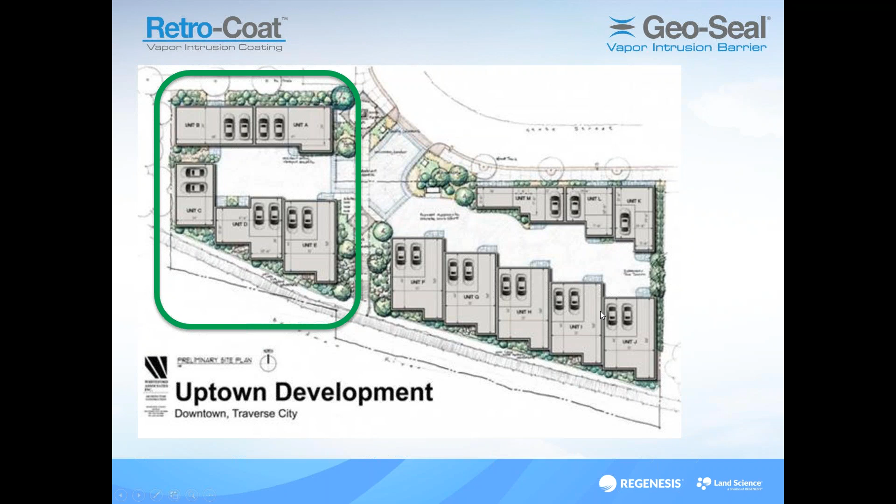I wanted to put a quick excerpt out there of what we actually got from the Uptown Development Manager. His quote: 'Without Land Science, the Geo-Seal and Retro-Coat vapor barriers, the redevelopment of downtown Traverse City's brownfield site with this upscale residential townhome would not have been possible.'

Those were the sites I wanted to spend some time talking with you guys on. I'm running out of time, so I'm going to end it now, but I appreciate your time and everybody joining the webinar, and I'm going to turn it back over to Dane.